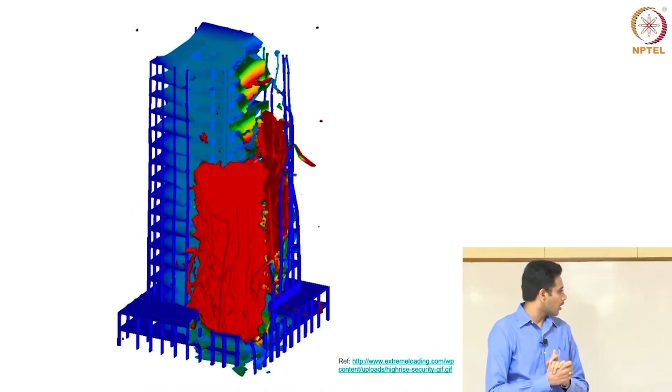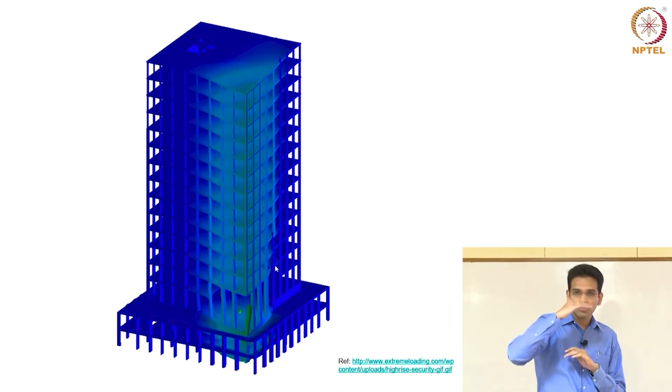Here I have an animation or simulation of a computational model. You can see it's a model for blast loading in a building. What's happening is at the bottom there is a blast, and a column at one of the corners starts failing, leading to a progressive collapse upwards. Each slab and structural element in the slab keeps collapsing, leading to a collapse of the entire section of the building.

These kinds of things can be studied well in advance, even before such events happen. You can try to predict how a building might fail if there is a blast load, and then try to strengthen the building for different cases and come up with innovative designs.

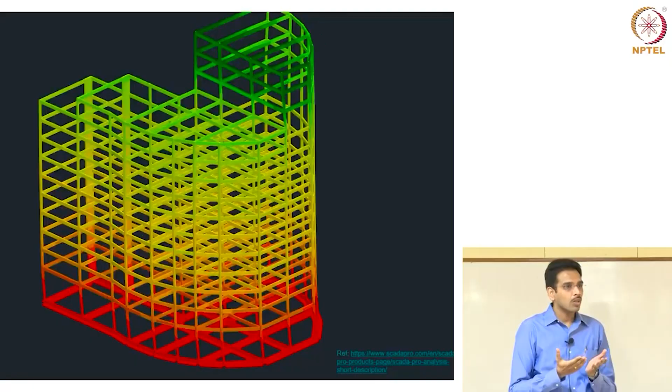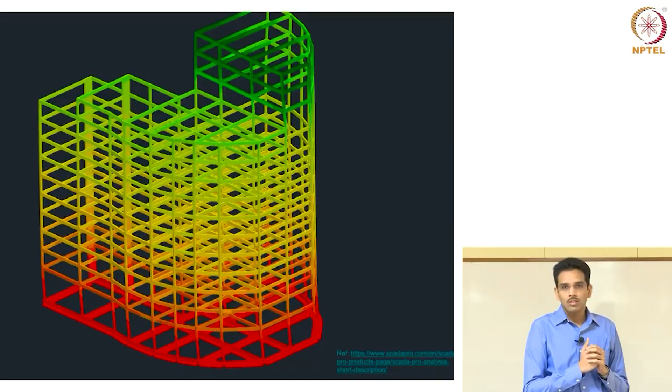This is another simulation of a building subjected to earthquake loads. What is an earthquake load? An earthquake is where the ground shakes. Here we are looking at ground shaking in a lateral, horizontal direction, with a simulation of a structure on the ground. You can study how the forces or deflections of the members vary as the ground shakes, giving a sense of the maximum stresses or forces the structure can take.

Is it good enough? Will it be safe? And if not, can I resize my structures—for example, can I make my beams and members larger in size so they will be stronger?

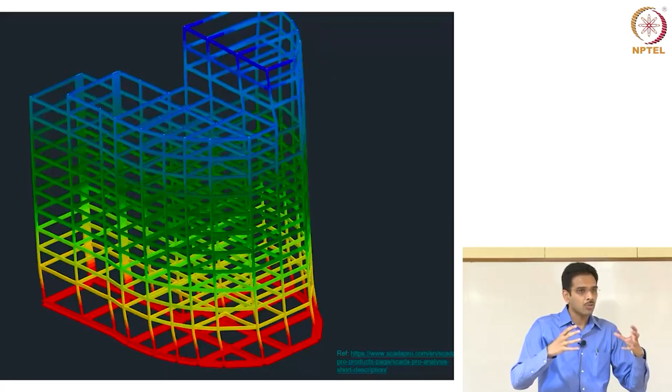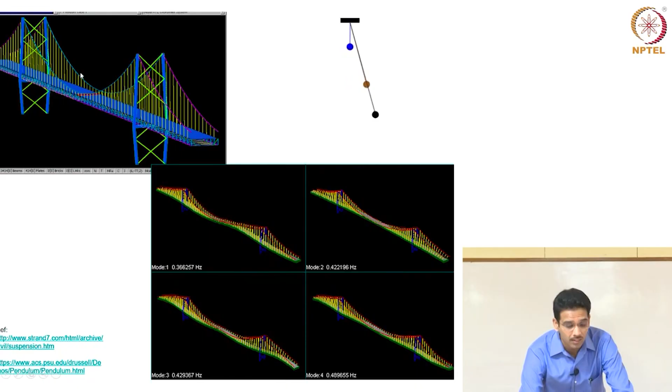This is another example—we'll look at these three examples and then go into the course. This is a suspension bridge. In a suspension bridge, you have a deck suspended from cables at the top. Suspension bridges are important because their dynamic characteristics matter—when you have a bridge, it's subjected to dynamic loads: vehicle loads, wind loads, earthquake loads, and so on.

So why are dynamic loads difficult to understand, and why is it important to understand structures in the context of dynamic loads? Think about a simple pendulum—let's start with the simplest object you know, a pendulum oscillating. A pendulum has a natural frequency or time period, which is the time taken to complete one oscillation.

I have shown three pendulums here: one blue, one golden, and one black. The difference between them is the length of the pendulum—their geometry is different. So if the geometry of a structure, in this case the simple pendulum, is different, it can have a different frequency of oscillation. The blue one oscillates much faster than the black one. Similarly, when you look at a structure, depending on its size, the material used, and how the structural members are connected, you can have different modes of oscillation.

In the bottom figure, I showed 4 different modes of oscillation. In a simple pendulum case, you just have one mode of oscillation, so there is just 1 degree of freedom, as we call it. But in a structure, there are different kinds of oscillations that are possible. For example, the first figure is more like a sinusoidal curve, but the second one is more like a lateral torsional oscillation.

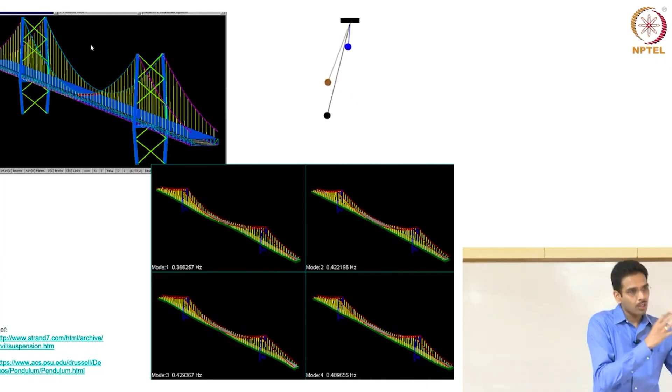So different such oscillations are possible, and each oscillation has its own frequency depending on the geometry of the structure. So in summary, it's all about how this geometry and the material property affect your frequencies, and how these frequencies are related to the dynamic forces acting on the system. If you can understand that, you can design the structure better for the dynamic loads.

So now let's get into what is modeling and simulation. What are models? This is quite a general concept. Models are used to understand, explain or predict something. They could be theoretical models, mathematical models, numerical models, computational models, statistical, phenomenological and so on. We will see some of these in the next few slides, what they actually mean and how they are different.

So if I want to understand car crash, I don't necessarily have to crash the car thousands of times in different directions. Maybe I run a few thousand simulations and then finally test one or two of the critical ones. And when I want to do that, what I need to understand is a mathematical or theoretical model for the structural chassis of the car. And then do some computer simulation, solve this problem on a computer, and then I can visualize what's happening.

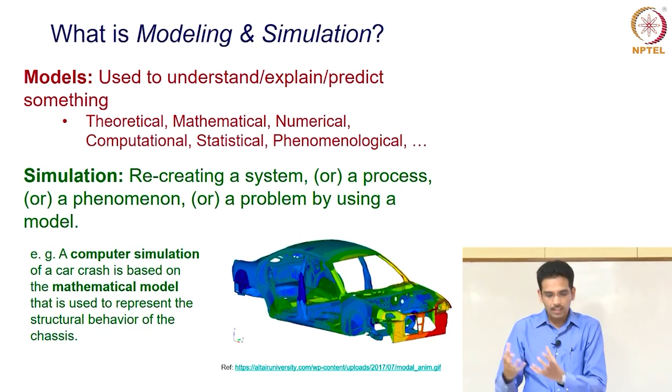So these are some examples of modeling and simulation. The first one is weather forecast. Let's say you want to predict the path of a hurricane or when the cyclones would come, which states the cyclone would cross, and so on.

This is very important for irrigation purposes and many other water resources problems. So this is typically done based on previous data, and also you could use atmospheric physics. So it's a combination of physics and data problem.

Financial engineering is related to stock markets. So you have stock market data based on many years, the trend of the stock market, and then you want to decide whether to buy a stock or sell a stock depending on how you predict the stock market is going to behave in the future. And for that you need a model for it. This is typically done using statistical modeling.

And then there are also other models. For example, atomic molecular interactions have to be modeled if you want to design drugs for some diseases. I want to study how the molecules are going to interact, form bonds or maybe break some bonds to create new drugs, maybe for cancer or other diseases. So such research can be done if you model atomic interactions using maybe some experiments as well as some physics-based laws.

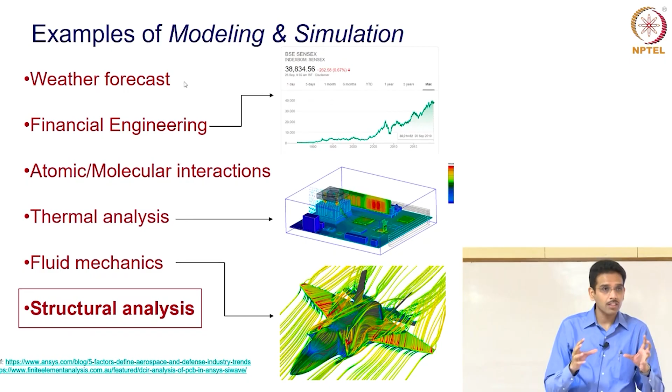So before we go into the actual talk, let's motivate ourselves why computers are important. I am sure you know why computers are important for various reasons, but in the context of modeling and simulation, why are they important? Let's start with one of the basic problems.

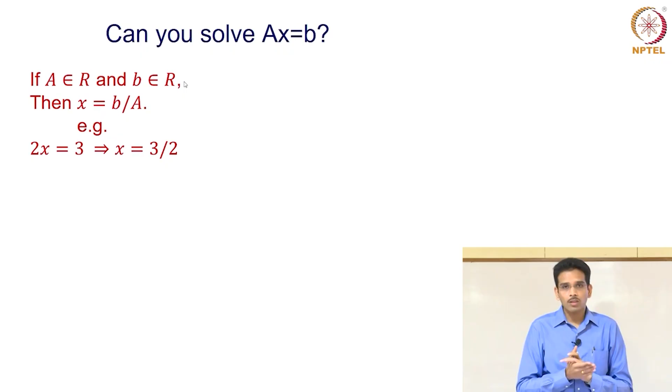Can you solve Ax equal to b? What do you need to solve Ax equal to b, an algebraic equation? You need the input a and b, and if a is a real number and b is another real number, you should be able to tell me what x is. For example, if 2x equal to 3, x is just 3 by 2, right?

Now what if I say a and b are not just single numbers but they are matrices? If a is a 2 by 2 matrix and b is another 2 by 1 matrix such as the one shown in this example, can you find me a vector of size 2 by 1 from this given input? Which is quite trivial. You just have to invert this matrix, which can be trivially inverted for a 2 by 2 matrix as shown here, and then multiply with the right side vector, you get your unknowns x1 and x2.

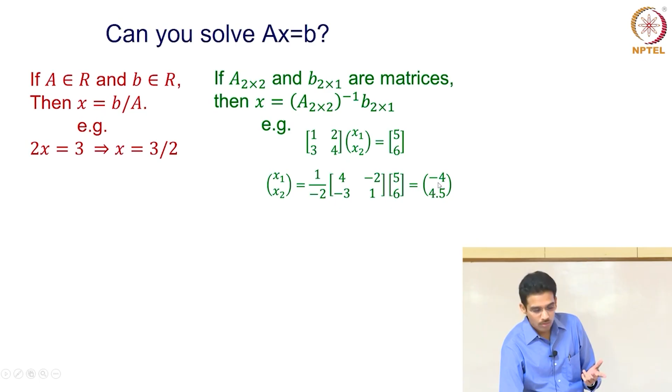But then if I ask you, can you solve this matrix system with an n by n matrix and an n by 1 vector on the right hand side? I am basically asking you to find x1, x2, up to xn where n could be maybe 1000. I am asking you to solve 1000 equations at the same time. Can you do that manually? No, right? So why don't we use computers for that?

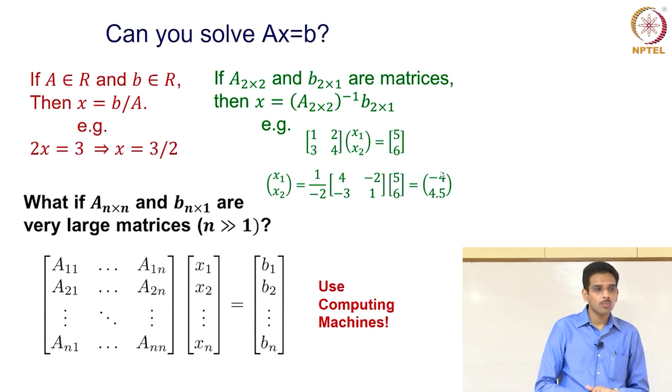So let me put this into a bigger context. What are computer models made of? I have this numerical problem in terms of a huge matrix and a set of unknowns x1, x2, x3, up to xn, and given b1, b2, up to bn. Let me give you a physical context of what this means.

Now once I establish the context of this problem, I have this numerical problem which I have to solve. I have a matrix, I have a force set, and I want to find the displacement on the structure. How do I solve this matrix problem? It's a linear algebra problem. You typically have algorithms or solution procedures for standard problems in terms of the properties of the matrix A.

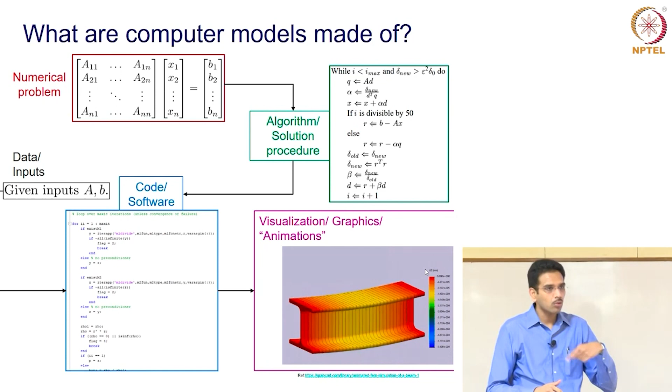So now let's see how one could develop a theoretical or numerical model for a typical structural engineering problem. You are all familiar with Hooke's law, right? If you have a spring and apply a force on it, the elongation of the spring is proportional to the applied force. This is the standard basic Hooke's law, given by the expression kx equal to f, where f is the input variable force on the spring and x is the corresponding elongation.

A similar analogy can also be applied for a steel rod. A steel rod is also a spring, except that its stiffness is much higher than a normal spring. So again you have a Hooke's law for a steel rod. Why is this useful? Once I have this model, the theoretical or mathematical model for a spring or rod derived based on experiment, next time you give me a force applied on the spring or rod, I do not have to go back and do my experiment. The model is now able to predict the displacement that can occur in the rod. That is the idea behind developing a theoretical model, and it's quite simple and obvious if you think about it.

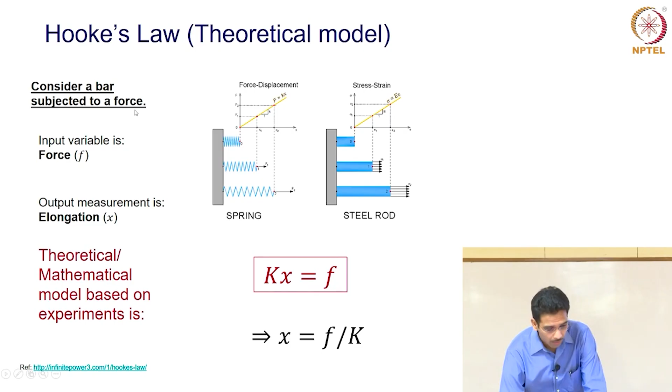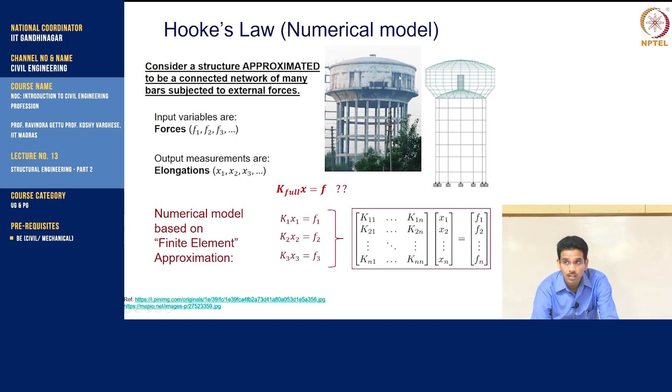That is what I want to do. What do I do based on my previous experience? I have to do an experiment. So if I can do an experiment with forces and displacement and make a plot, and maybe find this K, the stiffness of the structure, then I am good, right? But how easy is it to perform experiments on structures like this, or maybe more complicated structures we'll see eventually? It's not quite feasible.

At this point, we use the math and develop what is called numerical models. Since I know how to deal with a single rod, I can approximate this entire structure as a combination, or a network, of many bars which are subjected to forces. Each bar here is connected to every other bar, and it kind of approximates this real structure. So when you are approximating, you know you are dealing with a model. Now this is a numerical model, right?

And since I know for each bar I can write K1 x1 equal to F1, because each bar still obeys the theoretical Hooke's law which we saw in the previous slide, for the entire structure all I have to do is combine all the equations from the bars and develop this huge matrix. This huge matrix times displacements at each of the rods and the forces on each of the rods is what dictates the structural behavior of my complicated structure. So this is what represents a numerical model for this problem.

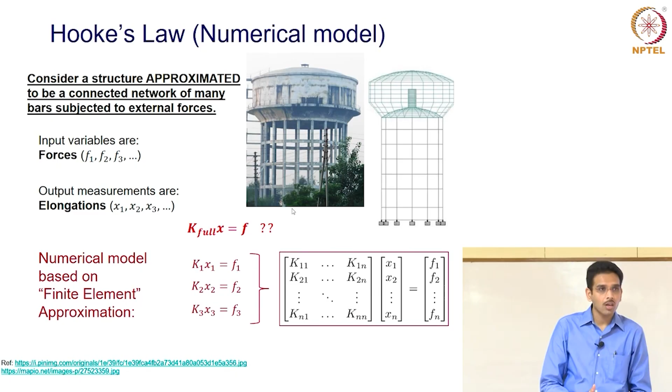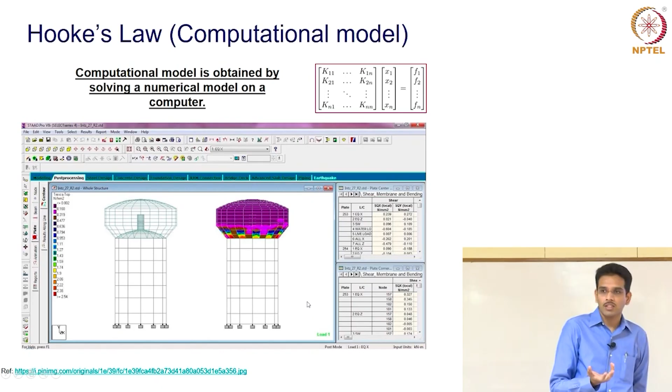Once you solve this numerical problem on a computer, because it is so huge you cannot solve it manually, that becomes a computational model. So you take a real structure, convert it into a numerical model, and then solve the problem. Maybe you press some buttons, but what is actually happening is that the code is running and trying to solve the matrix problem, giving you the displacements or forces or whatever you asked for. Then you can visualize the results and make sense of whether your structure is safe, or whether you want to change it, and so on.

So let's put it in the overall context of what you might have seen in the previous two classes on structural engineering, maybe about analysis and design. When somebody wants to build a structure or a bridge, they start with an idea: I want to build a bridge here, or a building in this location, and this location is characterized by such and such atmospheric forces, temperature, material requirements available there, and so on. Based on all that, you start with an initial design, or preliminary design, for your structure.

Once you have your design, based on what we just saw, you cannot do a full scale experiment for it. In rare cases that's possible, but in general it's not. So you construct a computational model for the initial design, informed from theory, experiment, as well as mathematics. Once you have your computational model, you run it through a computer and perform the analysis to see whether the structure is safe and acceptable, whether that initial design is safe and acceptable.

Can it take all the forces without failing? Will the structure stand or will it fall? If it is safe and acceptable, you end your design and you're good to go with your initial design. If not, you go back, maybe change the layout of your members, or change the sizes of the members to make it more or less strong, and then update your computational model again, because now you've changed your structure, and perform the analysis again. This loop keeps going on until you are satisfied with it.

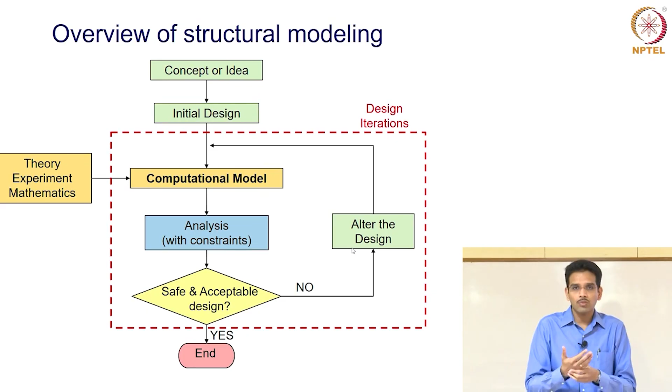So now let's look at some applications on how this structural modeling has helped in designing some of the most complicated and wonderful structures on this planet. I'm sure you might have seen in other lectures in this course. Burj Khalifa is the tallest building on the planet, and there are some interesting aspects to it from the context of structural modeling and simulation.

When I say you have an extremely tall building, what comes to your mind? Imagine you are on the top floor - high wind loads, right? There's going to be very high wind loads. So how is this building different from any other? Because you are at such a high level, maybe you have a stream of jet winds coming onto your building, and that might affect some structural dynamic behavior which we discussed in the beginning.

If you look at this blue part of the animation, I am showing you a cylindrical structure put in a fluid motion. The fluid, let it be wind or water, is moving on the cylinder, and once the velocity crosses a particular point, you will see what is called vortex shedding happening here. There are some features in the fluid that keep moving away from the structure, and if this happens at some frequency that can resonate with the structure, it can make the structure oscillate, and that can be very bad - it can even lead to collapse.

So you do not want your structure to be a cylinder standing so tall where the wind is so bad that you have vortex induced vibrations, as they're called. To overcome that, designers came up with this interesting design where they have cylinders staggered as you go up. If you see the structure, there's some sense of spiral action going on - the cylinder height here is higher than there, and so on. This staggered pattern disrupts the periodic shedding happening on the structure and prevents vortex induced vibrations.

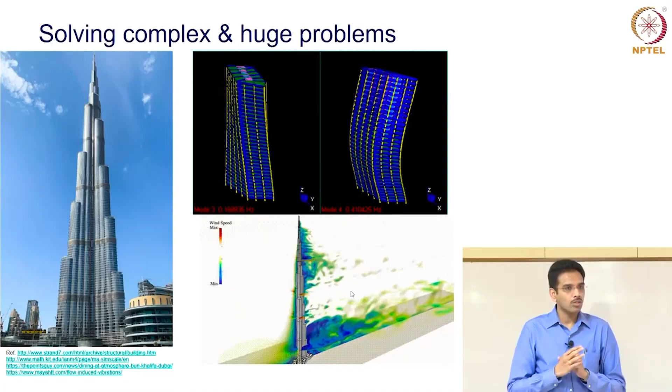This is another example where you have an earthquake load on the building, so it's oscillating in different modes. You want to study which dynamic modes are critical for the building and so on.

If you look at those buildings and count the number of rods we said we'd describe the structure with, you can imagine your matrix size could run into thousands. In some cases it will be of size million by million, or 100,000 by 100,000 - orders of millions in many structures when you have very small rods approximating such a huge structure. Can your computers actually solve a million by million matrix times some vector of given forces? A simple standard computer cannot necessarily solve very huge problems. In such cases you have to deal with what are called supercomputers.

To understand this, you need some background on high performance and parallel computing, because in today's world most computers, even personal computers, use parallel computing. Parallel computing doesn't necessarily mean having 10 computers in front of you. You may have many cores, and whatever job you're doing, instead of making calculations one after another, you want to do them all in parallel. Let's see how that works.

Let's say I'm interested in calculating a matrix times a vector. Typically, I calculate B1 as the product of this row times the vector: A11 x1, A12 x2, and so on up to A1n xn. Only after that can I go to B2 and do that row times the vector, and so on. If I write a MATLAB code for this: for i equal to 1 to n, for each Bi, calculate the product of the row elements Aij times the corresponding elements of vector xj. The way this works, it calculates B1 first, then B2, and so on.

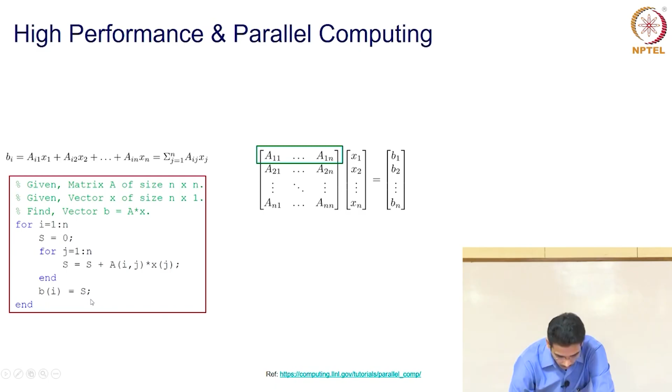So what we suggest is to run the first loop on multiple computers. What I want to do is calculate B1, B2, B3, up to Bn, all simultaneously.

To get an intuitive understanding, I have a couple of figures from the Lawrence Livermore website. In the first figure, you're looking at plowing a field with one tractor versus 100 tractors going at the same time — you can finish the whole field in the time it takes one tractor to traverse it. Another case: constructing a building with one worker versus 100 workers working on it simultaneously.

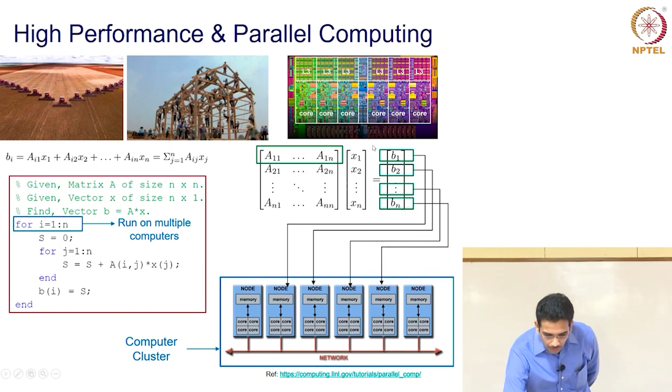That's the idea. Now I calculate B1 on one computer, node, or CPU, B2 on another CPU, B3 on another, and so on. But what we need in addition to standard computers is a network connecting all these computers to tell them that B1, B2, B3 belong to the same problem. That's called a computer cluster. Many thousands of computers can be connected this way, and very huge problems can be solved on them in parallel.

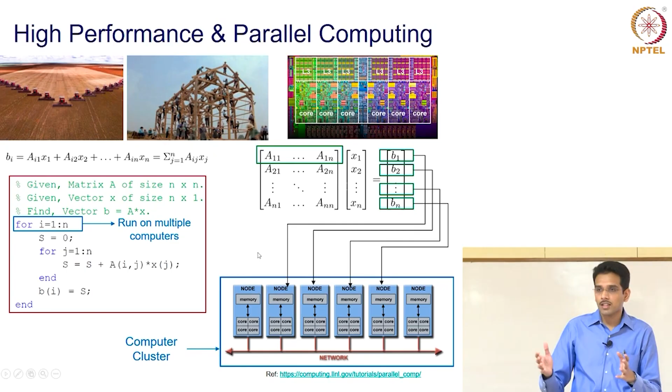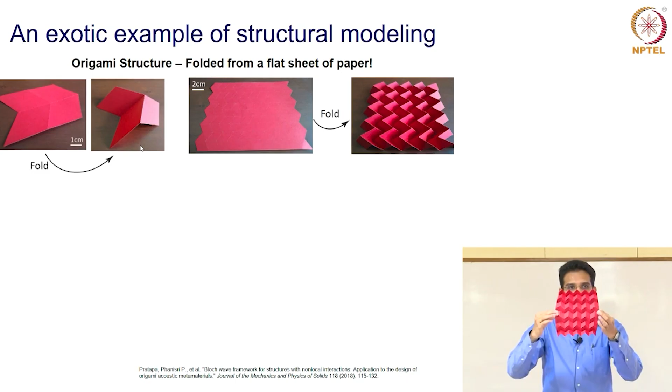Let's say I want to model it structurally. Before going into the structural model, I have a paper model here you can come see after class. It has an interesting behavior: if I pull it out, it extends in both directions. Why is this interesting? If you take a rubber sheet and pull it out, it contracts in the other direction. But in this case, pulling it out in one direction makes it extend in the other direction. This is called a Miura origami sheet — origami being the art of folding paper.

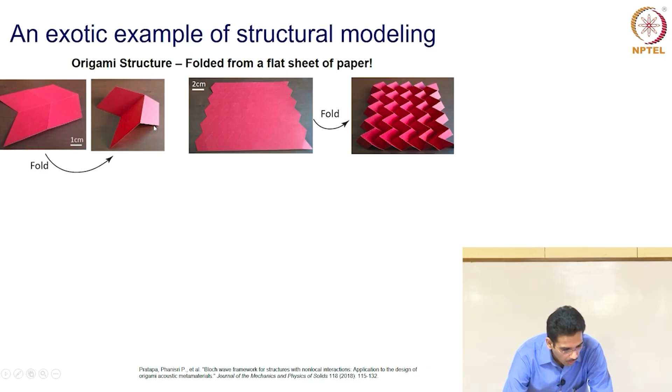Now let's do a structural model for this. I take my unit cell, understand its geometry as shown here, and now want to model it structurally. What do I do? I go back to my idea of replacing the structure with bars — and bars are nothing but springs. So I have a quadrilateral panel here, and first I replace this quadrilateral panel with a set of 4 bars.

I understand that the opposite corners of the quadrilateral panel cannot be independent. They cannot just go out as they want because it's just a plate, right? So they have to be quite rigid. That means I have to put another bar connecting the diagonal. That is a more realistic representation of this panel, right?

So that's how I come up with a model, and I put some springs on it to give a structural behavior. After I do that, I model it on the computer and simulate it. You can see it gives the same behavior as I have shown you. As you pull it out in one direction, the other direction expands, and if you contract in one direction, the other direction contracts, right?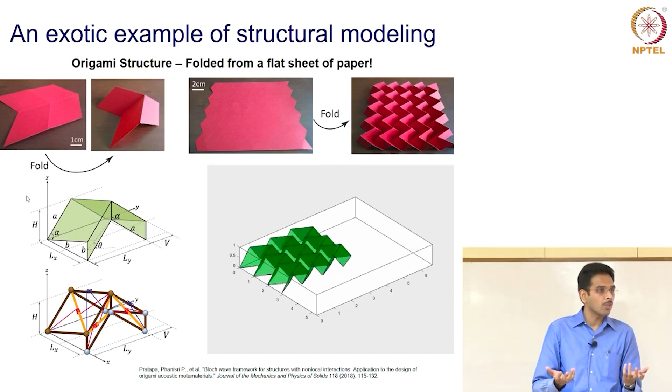So this is how structural modeling can help you understand structures which you didn't know how they would behave, for example. There are also other systems such as atomic systems, like the one shown here. This is a combination of graphene and carbon nanotubes. These days you might be hearing a lot of these buzzwords, carbon nanotubes, graphene, and so on. They have interesting electronic properties and so on, but even structural engineering has a role to play over there. Why is that? In the end, nobody wants things to fail structurally.

If I am making an electronic circuit or a PCB or whatever, I don't want it to break. I want it to be strong enough for whatever stresses it's undergoing. Even the smallest things are subjected to forces, and I don't want them to break, right? So in this case, researchers have found that if you combine carbon nanotubes, which are shown as pillars here, these are carbon atoms, and then combine the graphene sheets, they have a better structural property than both of them working independently. This has a lot of applications in electronics.

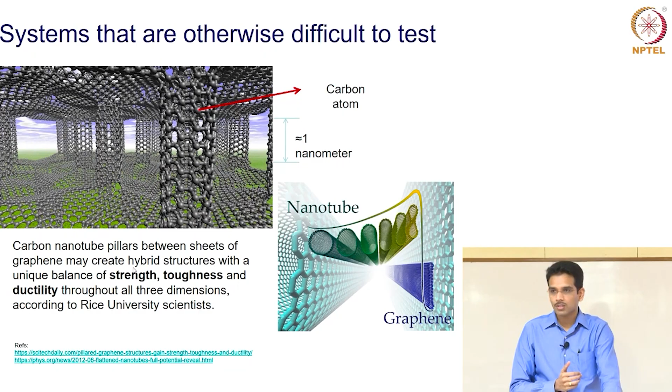As structural engineers, I see them as columns and slabs and beams, and it's the same concept, right? In fact, the researchers who found this idea were civil engineers from Rice University. So this is another interesting application of modeling.

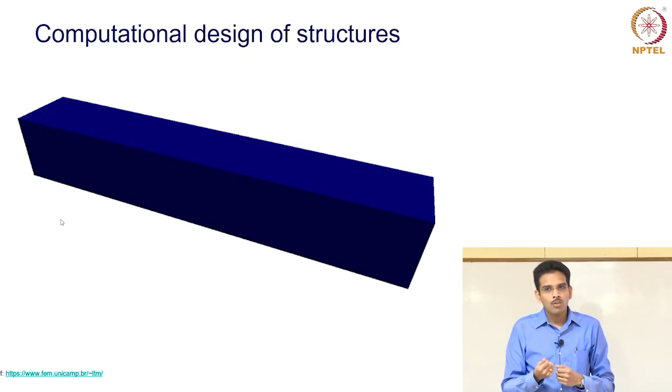In the previous flowchart where we discussed design iterations, I said once you are not happy with your design, you go back, change your member sizes, and analyze it again. But doesn't it seem a little bit inefficient that I have to tell the structure what to change, what to increase, what to reduce, and so on? It would be nice if I have some sort of optimization model which tells the structure, no, now you want to remove the material there or maybe increase the material here to make it more efficient.

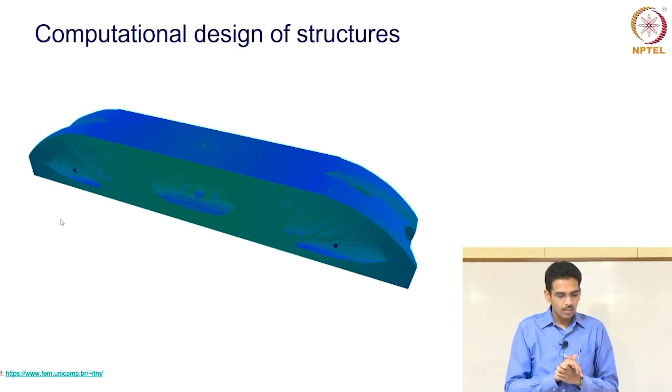So that is what is happening here. I start with a cuboidal domain shown in blue color initially, and then I applied a load at the top, and then gave it an optimization algorithm which says remove the material that is inefficient, not taking load efficiently, and that gives you the beam structure which uses the least amount of material. If you use such algorithms to design futuristic buildings like the one shown here, you get these kinds of bracings which are similar to what you might have seen in standard buildings but are also slightly different. These are supposed to be at least theoretically optimal and more efficient in terms of structural efficiency.

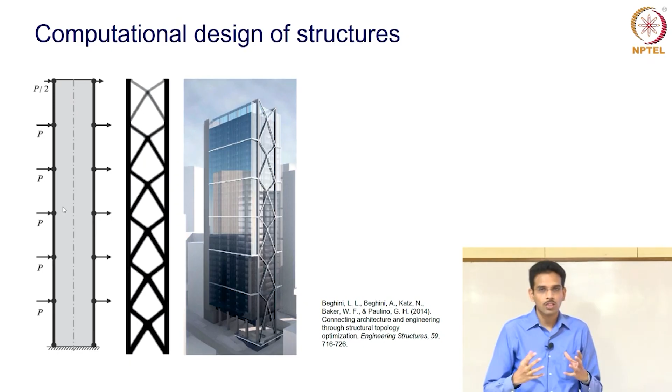If we have time, we can go over in detail what kind of cantilever structures you can obtain using this algorithm. I think you might have seen cantilever structures in your previous lectures. A cantilever is when you have support on one end and I apply a load somewhere else, and in between I want to create a structure which can take this load to the support, right? That is explained in this figure here, and these are some examples of cantilever structures where you have support on one end and a huge structure in between.

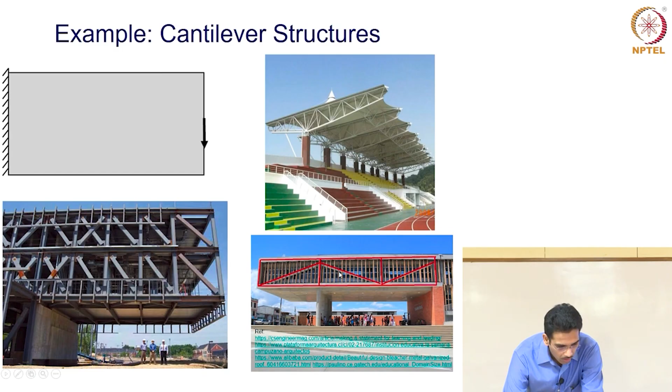So let's see how they compare to what this optimization algorithm would give. The optimization has told me that if this length is small enough, I just need a V-type brace, and as you increase the length, you need more and more braces to transfer this load to the support, right? But one thing is common between what is existing and what these are.

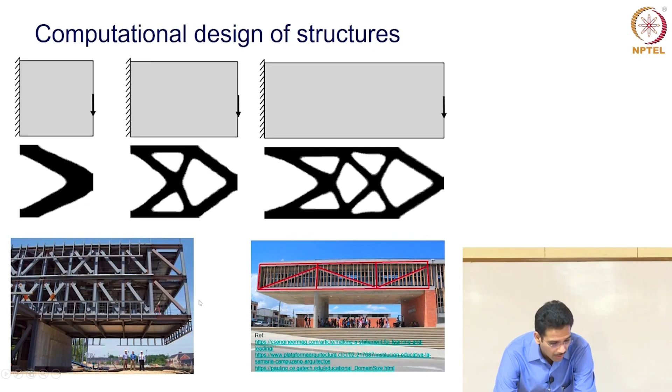Braces are common, but the way the braces look and the amount of bracing needed at one end versus the other, that is changing. There is hope that you can make structures more efficient, maybe using 50% of the material to get the same structure. So all this sounds good and looks interesting, but can we actually build it? That's probably the question you have in mind.

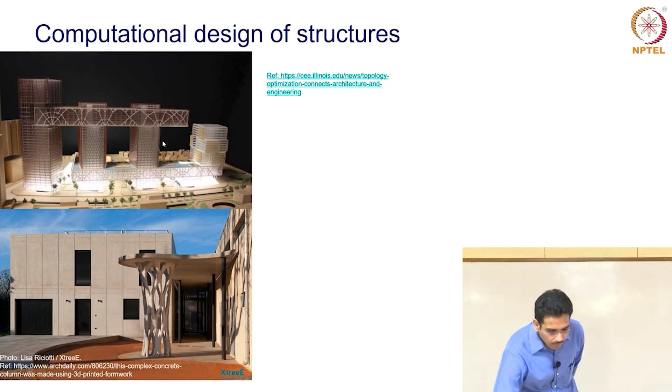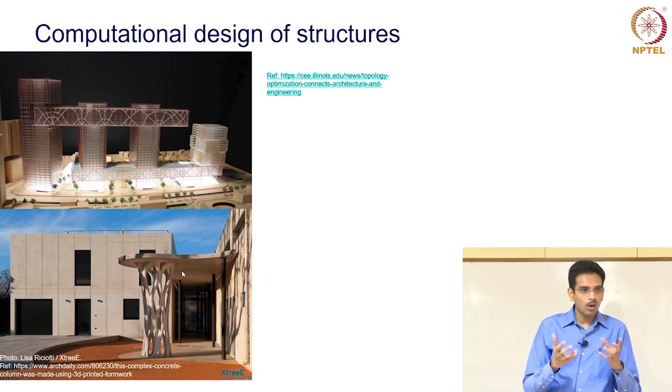Here is an example of a concrete structure. This column is made out of concrete, and typically you might not have seen concrete in such random forms. Even if you build concrete in a weird shell shape, you have to take a lot of effort to make the formwork for the concrete. In this case, they used 3D printed formwork to make this complex 3D structure. What I want to highlight is, it's not impossible to make structures which weren't possible before. There are always advances happening in the field to build structures using innovative techniques, and what you thought might not be possible might be reality tomorrow.

Another surprising thing is you even have 3D printed metal lattice structures, and these are right now actually being used in industry for automotives and manufacturing. So that has already become practical.

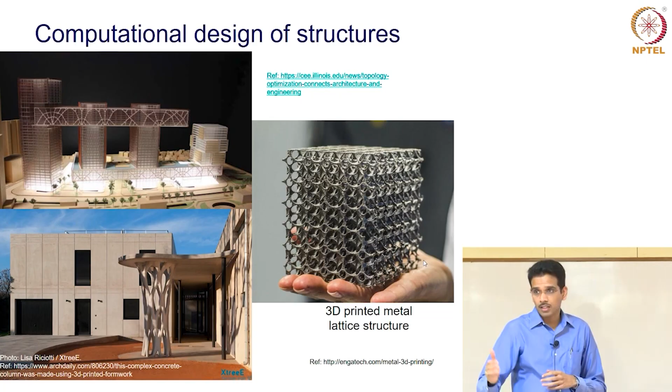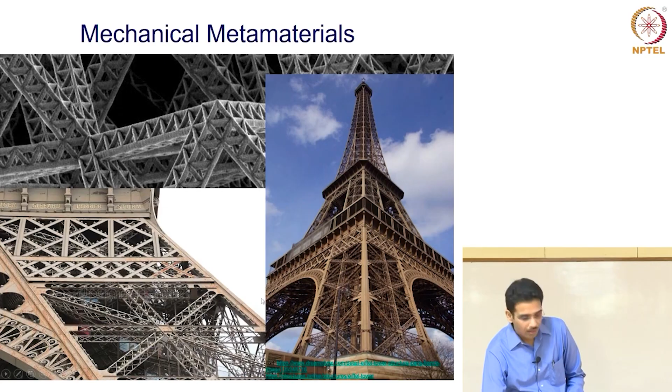Can anybody guess what this is? Does it look something like a part of the Eiffel Tower? Maybe it looks like this truss structure? But if you notice this length scale shown here, it tells you the length measurement from here to here is 10 micrometers. What does that mean? The entire width of the slide is about the thickness of your hair strand. So somebody actually sat down and used advanced manufacturing techniques, maybe such as 3D printing, to build a structure within the thickness of your hair strand, inspired by big scale structures like the Eiffel Tower.

Why is this important? How does this make sense, or who cares about this? If you think about the optimization algorithm I was talking about, removing the material which isn't taking the load and making the structure more efficient, using less material causes less environmental impact. That is one motivation for designing structures more efficiently. If you remove material which isn't being used, you make the structure lightweight while keeping the same strength. So you are making your structures lightweight and high strength. Many of the structures you see around may have too much weight just because we don't have any other way to manufacture them. You don't want to do that.

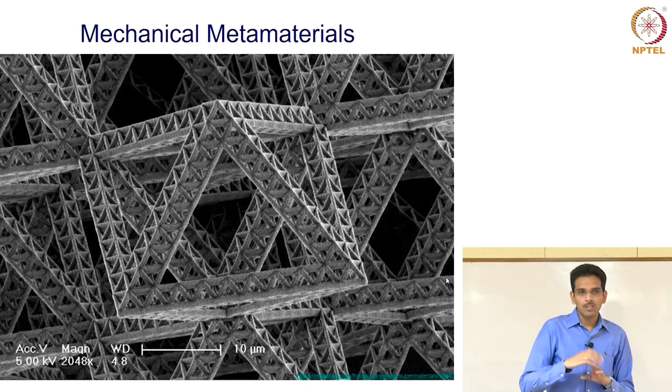These are called mechanical metamaterials. They are made in exotic ways and have exotic properties which you might have thought are not possible. Here's another example of mechanical metamaterials. What are metamaterials? These are artificial materials that can exhibit exotic engineering properties. What is exotic? Something fancy, something you thought doesn't make sense. Let's look at an example.

An invisibility cloak. Most of you know about Harry Potter's invisibility cloak. It's a garment - when you enclose it around an object, you will not be able to see the object. Does it physically make sense? Is it just pseudoscience or science fiction, or does it make sense physically? It can be explained physically, but the practicality is a different question.

Let me try to explain what is actually happening with invisibility cloaks. On one end, light waves are coming in and there is an obstruction, and somebody is viewing the light waves from here. If there is an obstruction, I should not be able to see what is behind it - that is reality. Now if I can make some kind of metamaterial around this which will behave in such a way that it takes these waves, manipulates them, and sends out the same waves as they are coming in, such as the one shown on the right side.

If I can do that, if somebody is sitting here, they will exactly see these light waves as they are, which means they will not see what is there, the black dot they will not be able to see. That is the idea of the invisibility cloak and metamaterials associated with it.

Practically we still do not have it yet, but I take inspiration from this towards what are called elastic or acoustic metamaterials. Instead of light waves, let's say you have sound waves or maybe structural vibrations. I can use the same idea to create some sort of metamaterial around a structure I want to protect and make sure these waves do not touch my structure and just go away.

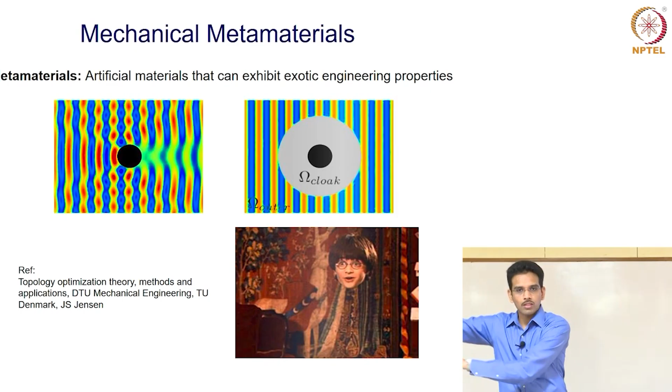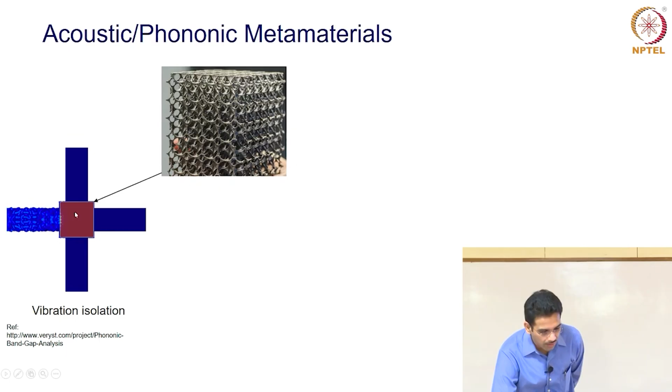That is explained in this simulation here. Let's say I have some metamaterial shown in this lattice, and you have vibrations on one structure, and I don't want these vibrations to go to the rest of the structure. If I can design the geometry of this structure using optimization such that these vibrations cannot pass through, they will be repelled or absorbed by the lattice, then I can protect this part of the structure. So you can isolate the vibrations.

Another example is wave guiding. So I have this lattice, and you can distort the lattice in some way to make the waves propagate in a particular direction you want. Theoretically this is all possible. There are challenges, there are limitations, but the good thing is now theoretically it doesn't seem nonsensical.

Let's say I have a sensitive structure, maybe a nuclear reactor, and I can put such a lattice grid below the ground. If I can design the geometry of the lattice, you can potentially control vibrations, maybe earthquake vibrations coming to the structure, so they go around the nuclear structure and make it safe. The importance of modeling and simulation here is that you still do not have these systems, you don't have any experiments, but the theory and models developed fundamentally can be extended to more complex ideas which can result in futuristic structures and materials. That is what I want you to take away from this.

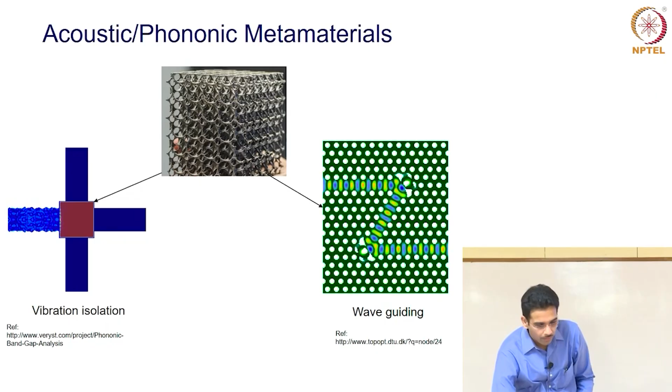Now let's summarize. I'll go over briefly the major topics we have touched upon. The first thing is models are intended to depict reality. Models are not reality. We want them to depict reality as best as we can using experiments or other insights.

Theoretical and mathematical models are typically derived based on experimental observations in most cases, but there are also cases where you can derive from first principles or fundamental laws. For example, Newton's law of gravitation or quantum mechanics can be used to understand atomic interactions using fundamental laws, not necessarily entirely based on experiments.

Computational models are obtained by solving theoretical models on computers, which we have seen, along with the importance of parallel computing in solving large scale structures. Structural modeling is useful to calculate properties of structures which are very difficult to obtain from experiments, and this is what we have highlighted in this lecture.

We also noted that it reduces the time taken for each design iteration. It makes the designing process of structures more efficient. And structural computational modeling is useful for analysis as well as design.

This is a relatively novel concept in the sense that optimization frameworks that can also design structures are not very rigorously or widely used in industry yet. There is a transitioning phase coming in where now you can do design and analysis, everything with modeling. At least that can give you insight on what the best designs can be, and then of course you can have the human factor in to make it more practical.

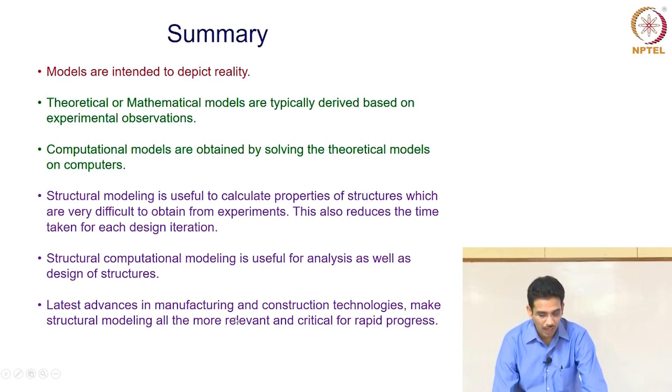Finally, the latest advances in manufacturing and construction technologies make structural modeling all the more relevant and critical for rapid technological progress. I would like to conclude with this: I believe that human creativity plus computers make advanced technological innovations feasible. Thank you.